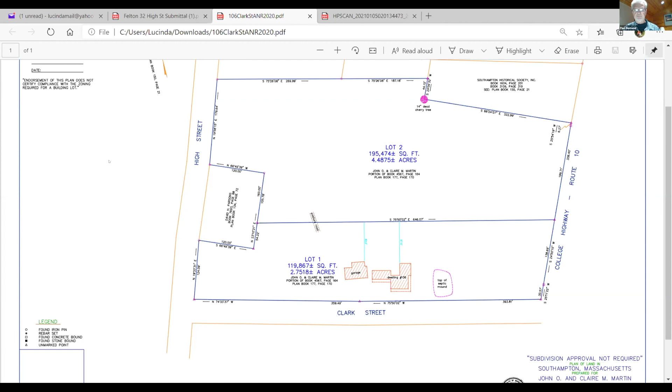Okay. Thank you. A quick question, Paul. Yes, John. The Mylar, will that end up in the planning board slot at some point that I can pick up? Well, I'm going to sign those, and I could personally drop it off at your house if you'd like. Sure. When do you want to do that? Okay, so you're at 106 Clark then? Correct. All right. I'll probably have it there Friday, no later than. Okay, and if it's more convenient, you want me to pop over your place, let me know that too. All right, will do, John. Thank you. Okay, thank you.

Our next agenda item is the continuation of a public hearing for a stormwater permit that Greg Felton had filed back in October for 32 High Street. And it's been continued twice previously because of the lack of information that we required. And I believe Bucky Sparkle is here, who is representing, he was here, there he is. I am. He is representing Greg for this project.

The plans had been emailed to all the members of the board, and also I believe Randall, you received them, and Ron and Ed. Conservation has received them. So at this point in time, we'll ask Mr. Sparkle, can you share those from your end? Looks like I can. So let me start this. So it's the one that you sent the planning board, not the one for conservation. They're probably one and the same, but in case there are any... They are indeed the same plan.

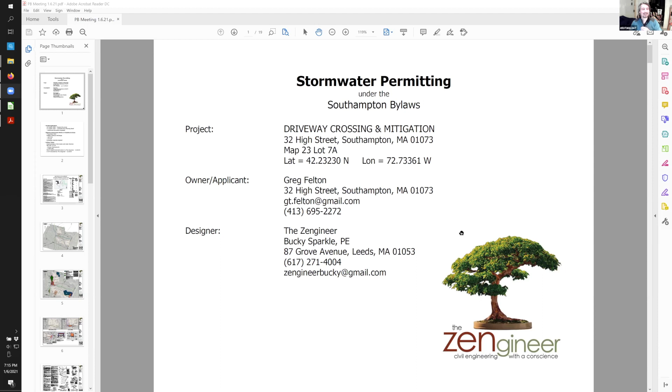And hopefully at this point you're seeing a screen that says stormwater permitting. Yes. Right. So what I've done is I've taken those plans and incorporated them into a modest little presentation that encapsulates the information that I'm aware of on this project. As you, I'm sure know, Greg Felton has been doing his best to do an awful lot of his development on his own, from running machinery to cutting down trees to letting all sorts of stuff happen that has not been done professionally. And I applaud his self-starter gumption, but I also see how he's ended up in a fair amount of hot water for a variety of things. And he's asked me to try and get him out of that hot water on a few points. So here, let's see how I do. Because I'd really like to get him back into compliance.

I think just to give a little background, Greg did his own application mid-October. We got comments back, received an email from the planning board a little bit after that. That was the basis for the letter, which I eventually submitted. But before I was able to do that, there was quite a bit of rain on multiple occasions, and I see Randall Kemp is on the screen because we did receive a serious and appropriate letter indicating that there had been multiple sediment discharges. The latest one being, I think it was the 1st of December, we had 3 inches of rain that day. And that site was insufficiently stabilized, and an immediate response was required.

Greg did get the street cleaned up. Hopefully Randall is satisfied with how that went. If not, I'd love to hear from him. If there's anything else that we could do better, I'm very open to hearing that. But part of that letter also said you need to come up with a plan. Of course, a plan needed to go with the permit application originally. So I was able to get out to the site about December 7th and take a look at the work that had been done to clean up the mess, the work that had been started to try and ameliorate stormwater runoff and sediment discharge off-site.

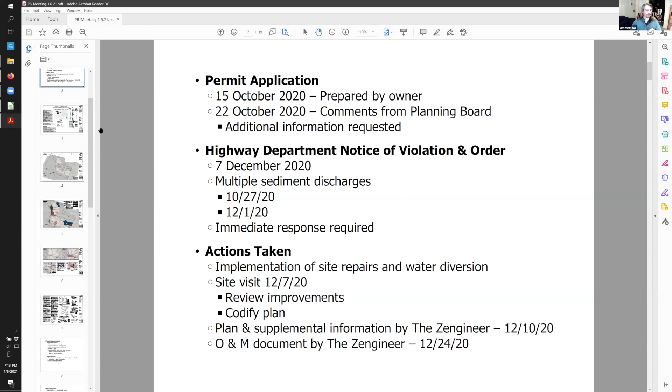I submitted a letter that addressed all of the points of missing information in the original application, and I provided an O&M document for the features that are going to be installed or are being installed. Now, let me jump in my presentation a little bit. We'll look at the existing conditions briefly just to orient people to the site.

So we have in the gray the long driveway that heads up, the future house site, and I will show where that house is on a proposed plan. The existing conditions also at the time showed a 12-inch HDPE culvert here that's still in place, as well as a small pipe that goes right to the edge of the road and a ditch that had been cut into the buffer zone. So this is the 100-foot buffer off the wetland. So anything north of that line needs to be approved by the ConCom, and this work had not been approved.

So I've been working with them a little bit, and I know Marla Hank is here, at least was earlier. So we're trying to keep this from being an ongoing problem. We're going to look at a proposed plan here, and most of this is dealing with the NOI. So there's a lot of color, there's a lot of action on this screen. I'm including it here because one of the things that the board requested was showing where the proposed house is going to go and the septic system.

So this box, this brown box here, is the proposed house site, and the proposed septic system is right here. And you can see the driveway, you can see the existing 12-inch culvert, and then you can see some proposed work. And then the next slide I'm going to show is going to detail what's happening down here a little bit better. So let me focus on this part of the world right here.

So in order to try and get a grip on what's coming off of this site, several things have happened. One is the previously permitted ditch was repaired because it had sustained damage during the heavy rain on December 1st. This pipe is still in place. The ditch has been extended to a new catch basin. I actually ran out there yesterday briefly, and there's now stone through here. There is a new catch basin here, and there's a 12-inch pipe coming down.

Now, I show a nice clear rectangle. This is a proposed retention basin, and Greg and his contractor were getting this installed, but because they were working in the buffer zone and it wasn't permitted yet, they've also stopped. So this work is not entirely done. It's in process, which makes this conversation very awkward because I can't say, oh, you know, we're going to be doing this. I'm sort of at this point of saying, well, they've kind of limped along, and then we had to stop them till we had everybody's permission and approval.

What remains to be done out there is connecting this 12-inch pipe, disconnecting the 4-inch pipe that already exists and replacing it with a 12-inch pipe. And then this 12-inch is in place, it runs all the way down here. So the sediment basin or retention basin is now sitting in this part of the site. It's deeper than I was asking it to be. I haven't done measurements on it, which is something that I'll want to see in the final result, that it has the volume that I'm calling for.

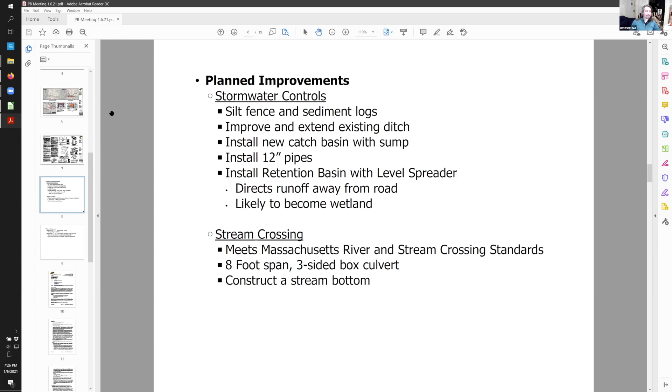Separately, this is more for the Concom, but on the uphill part of the site, and let me just jump to where that is. There is a driveway crossing here. The stream comes through here, and Greg had taken out an old little culvert thing and put in another small culvert. It did not meet standards, so this is how I got involved, and we did a stream crossing right here. So the detail is it's a big 3-sided box culvert with an 8-foot span.

So that's part of what's going on, because I think Greg has had some issues getting all of the water that's coming off the site to go through that little 8-inch pipe when we get 3 inches of rain in one day. So I think that has caused some of the problems here. So that won't be a problem anymore.

Oh yes, officially the last thing I do need to request is waivers from a couple points that are normally required for these permits. One is for the topographic survey, bylaw 14.g.1.g. At this point, pretty much all of the site work is complete, so a topographic survey doesn't really add a lot of information or value to the process, in my opinion.

And then bylaw 14.g.1.n1 requests proposed profiles and cross sections. And again, this work is basically done at this point. The 2018 Bill Saruta plan had a profile and cross sections for the road, the ditches, the culverts. That information was submitted with my plans, just so it was on the record as part of the submittal and permit.

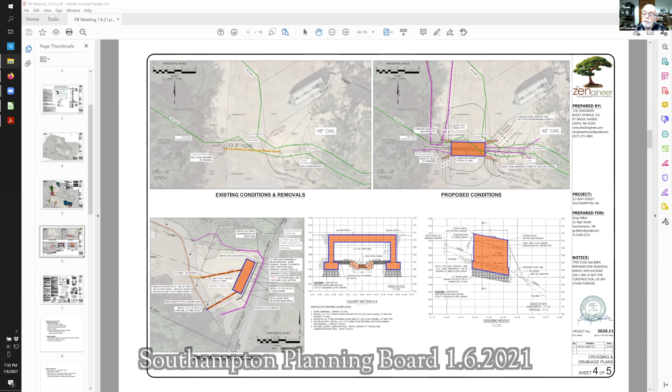So who directed them to put, so that was something that was not discussed with Randall? That was no, unless it was Concom business, but it was nothing that I had requested for sure. If I can speak from the Concom, I did get in contact with Bucky right around that time, just before Christmas, and my communications with him were to allow any work on the left side of the driveway, which was our RDA area, that would be perfectly okay. I went up there on Christmas Day just to see what was going on, and that, in fact, is what they did. Actually, Greg and his girlfriend were up there with a shovel, trying to curtail some of the water that was flowing down. But it looked pretty good to me, and I did communicate that with Randall that the site looked okay. I also followed up with Bucky with a written email stating the same conditions, that it was okay to handle anything left of the driveway.

I'm sorry, who's Bucky? I keep hearing that name. Oh, I'm Greg's engineer. Okay, sorry. So the excavator part, somebody was working on that lower retention pond as shown in this drainage improvements plan here? Yeah, so consequently, and I'm speaking for Marla because she's the one that saw it first, and then I followed up later. When I went up there, they had shaved away some of the hill, sort of made it so that the water would flow down that way. And again, this was in the buffer area, and they had dug out this retention pond or retention area. So that was done totally by Mr. Felton's permission, certainly not from the Concom.

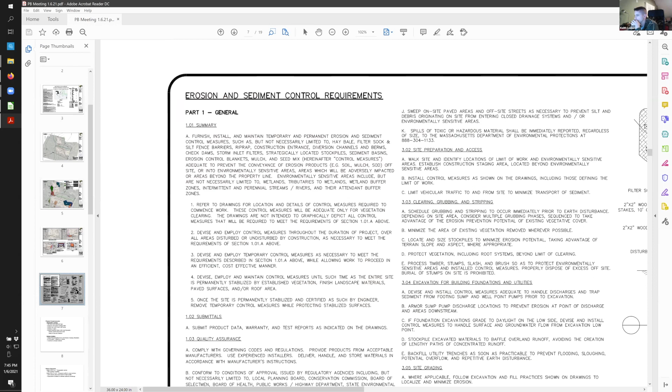Okay, so the details of the overall plan, or the construction details? I mean, the construction details, the ones that were hard for me to see. I wasn't sure. Yeah, sure. You had a profile there or something. I will. Let me back up. Actually, this plan that you were on previously, the previous plan. The previous plan?

Yeah, the one that you had the plan view. Okay, so what are we looking at? I see a culvert here. Where's that going in? All right. No, unfortunately, I don't get to see where you're pointing. I'm looking at culvert section AA, right in the middle.

Culvert section AA. Okay, so this is the box culvert. This is the section of it. This is a profile view of it. This is a plan view of it. So all of this orange here is replacing the 8-inch plastic pipe that is on the uphill side of the driveway. So it's not in this view. I have to go back one sheet. I see it. It's upstream. Yeah, it's upstream. So most of the work that's going on is down here.

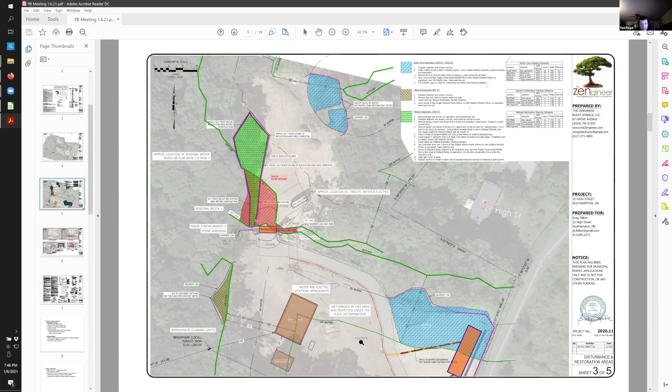Can you zoom in back to that culvert? So that's a hefty upsize from what's up there now. It is quite a hefty upsize. The Massachusetts stream crossing standards are relatively significant. And they're not there for hydrology. They're there for wildlife passage and maintaining a contiguous ecosystem through the water, the stream bed, the banks, all of these precious things that are disturbed when we build culverts.

So the box culvert allows you to have a big open stream that runs underneath. It's 2 orders of magnitude bigger than it needs to be to handle the hydraulic flow, about 100 times bigger. So we shouldn't have any more problems of things getting blocked and water going where it's not supposed to be going once that is installed. So you have that layout there and sized it appropriately from the standards. Yes. And so that's something he's going to cast in place himself. He will cast that in place. Sometimes they're prefabbed, but Greg is planning on building it on site.

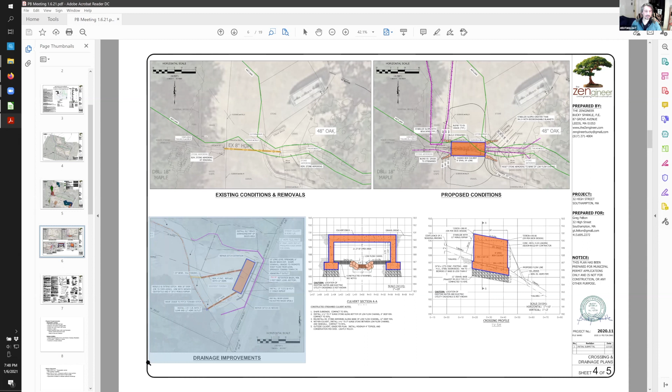Okay. And then do you have details of the connection and the hydraulic connections to the lower retention pond? You have 2 points. I know that you kind of have a general plan that's showing out what the plan is, but how is someone going to figure out elevations, or what do you have there for elevations and overall detail? It is true that here's a case where lacking a topographic survey, it does not give me the opportunity to say, oh, the ditch elevation is 152 and we need a pipe. They come down and the invert has to be at a certain elevation.

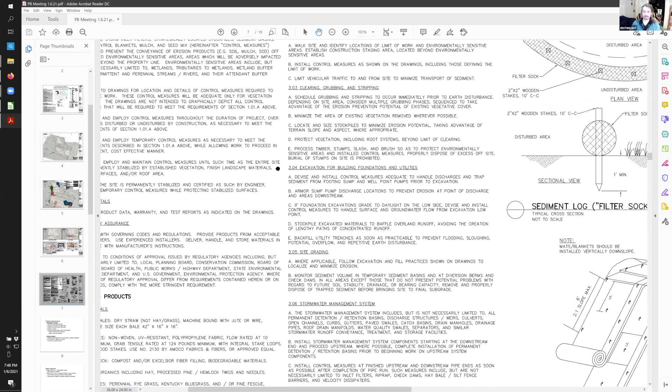The way I've designed this is established a relative elevation here. So if we go to the next sheet, I want to show you just a section of the... so here's the wetland replication. So the level spreader basically, and this is a section of as well as the retention basin itself. So it needs to be at least 18 inches deep, and we have so much elevation to play with, and there's no question like, well, can we get water to go there? Yes, water is very, very rapidly going there.

So what I've done is designed it as in, all right, we take an area that's relatively level, we cut down at least 18 inches minimum to the top of the level spreader. So this bar here is the level spreader, and there's a requirement to be at least 6 inches of freeboard above that, and then building a berm downhill of that. So it's a relative design, and any competent contractor should be able to handle that. I'm sure Brendan Monahan will have no problem. Frankly, more than half of this work is already done.

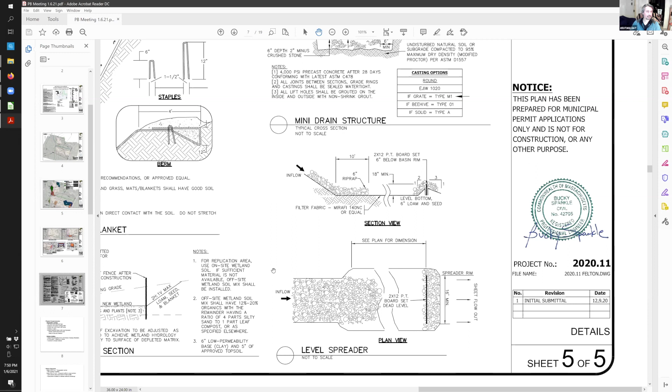And it's a little overbuilt. From what I was able to see, it's deeper than it needs to be. No problem with that. So Brendan was erring on the side of caution, it seemed, in terms of installing that. There is a berm on the downhill side that also supplements the 6 inches of freeboard. So if we jump back to this, where are we? When I'm zoomed in, it's hard to see.

Right, so basically my plan was to take a lot of the spoils from this excavation and put it on the down gradient side, because there is a slope across here, and I wanted to create as much buffer in between the basin and a potential overflow, because I want to control it at the level spreader, which runs on the northern side of the basin. So this is great. Okay, so this is an appropriate amount of detail.

I have some general questions that, you know, you're asking for a few waivers, and one of the recommendations that I would put to the board, if the board agrees, include, in lieu of the topo, and if this is something the board can discuss, you know, you provided relative elevation needs for the construction of this, as well as the overall sizing of the pipes, the 12-inch plastic pipe, as well as, actually you have two 12-inch pipes there, as well as the low sump or shallow sump catch basin that's at the downstream side.

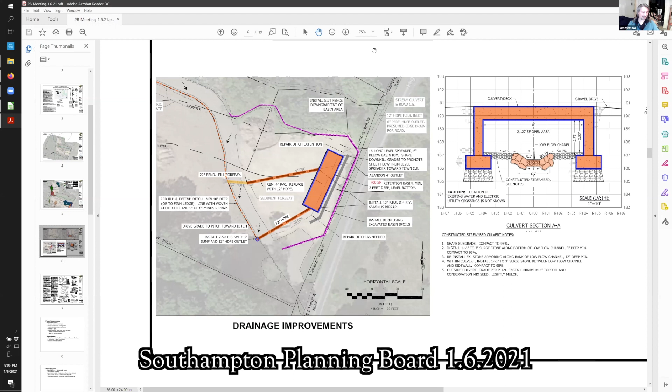I think engineering judgment goes into what Bucky's done here, and the level of preparation should be considered, given he's putting his professional liability on it. So I think that, coupled with his oversight during construction, might be suitable, if the board would consider that, given that we're just tacking on with the bond and then the peer review. That's just making the cost go quite a bit up. It's up to the board what the board feels comfortable with.

No, you're absolutely right, Paul. That's stuff that typically on a residential we haven't required, but this situation certainly is out of the ordinary, and the horse has been out of the barn a long time on this. So yeah, I can go either way on the bond, but again, if Mr. Sparkle puts his certification on it and inspects it along the way, we could trust that. I'm not quite sure we need an independent firm to come in on this unless some of the other board members feel strongly about it.

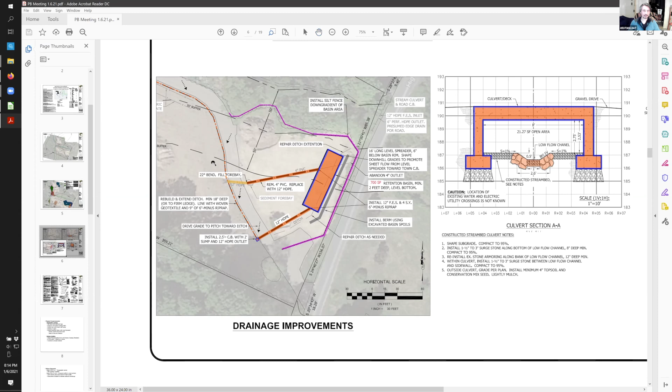Although I'll tell you, Paul, that annotation function, is that a Zoom thing that I'm just not? Yeah. So pull up your view options. Oh my gosh. You got it. I've never attempted this, so thank you. You're welcome. All right. Hey, I've learned something today. That's great.

So this dash, now that I've zoomed in, maybe I'm in a little bit close, but this dashed orange line is the ditch. This is the existing HDPE pipe that runs under there. So right now they have stone. We've got like 3-inch stone that is now lining this channel. The site's still a little messy, but it does hold water to this point.

And then there's a little rise. So almost all of the water is going to go to this culvert. It won't make it to the catch basin that's lower. So the catch basin is a backup plan in some ways. If for some reason this culvert is blocked and or overrun, he has added another 12-inch pipe.

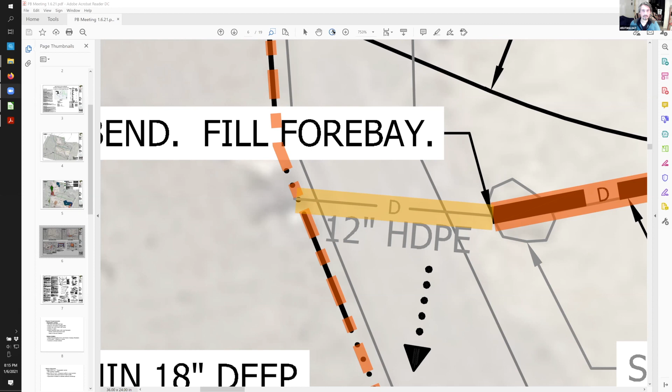I do want to back up a little bit. All right, there we go. So there is another 12-inch pipe that now runs through here and actually enters the side of the catch basin. So if this fails to handle all of the water, this now is in place.

And this is a buried pipe that comes along underneath the ditch, which then has stone over the top of it, but it's more like 1.5-inch stone, a little smaller. And that enters, this catch basin's already existing. He already built it. And then they have a 12-inch pipe that comes out down this direction.

So all of this is really a backup system and would only handle water that comes from the sky for here and a bit that comes from the hill above. But that doesn't necessarily all drain here. Some of it naturally flows this direction to the bottom of the screen. I guess it's relatively south. So that's how it looks right now.

So if you were to look at this ditch in cross section, if you were to stand up here and look down, you would see, here, let me do some drawing right on my own screen. You'd have the road coming over, the ditch would come down, the big hillside comes up, and the culvert end is here. This is really hard to make look good.

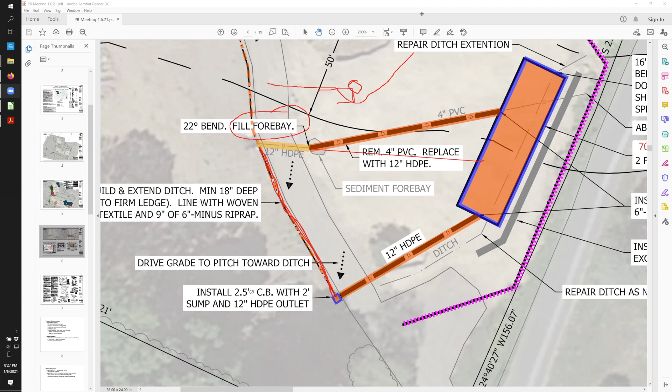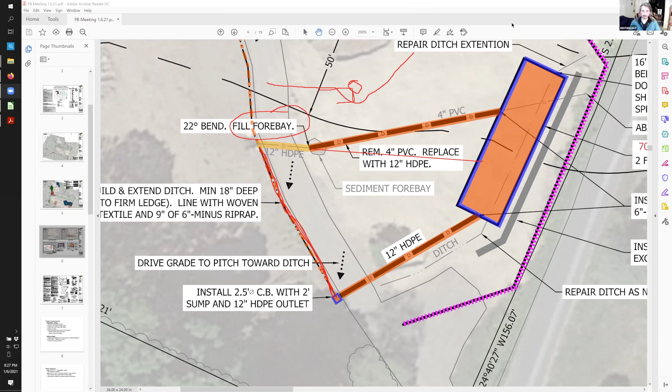Okay, that being the case, let me just go over, let me get a motion first to close the public hearing. This is Janet. May I just ask one question, Mr. Sparks, before you come? I believe you mentioned at one point that this orange thing here, the water would be going over High Street. And I just wonder, where is it going to go over High Street, and where will it go after it goes over High Street? Because we are down below this. Water only goes downhill. It doesn't cross High Street, fortunately. Part of this is very important to keep the water out of the road. So all those annotations, just stay right there.

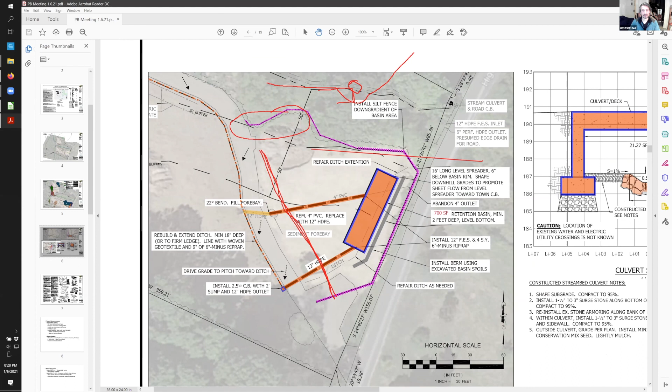So there is a catch basin here, which it's a catch basin and it's a headwall inlet for the stream, the intermittent stream that's on site. So the water from this entire site and the system would flow to the north. And isn't that uphill? It is not. No, the stream is much lower than this part of the site. And the road is much lower too. So I want the 4-inch pipe that currently discharges to the road right away. I want that eliminated. And then I would like to see the water sheet flow gently toward the stream and then toward the culvert catch basin that is under High Street.

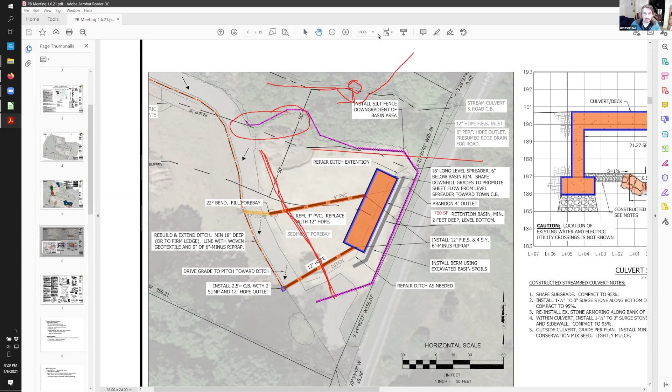So the water would flow under High Street. It wouldn't get into the pavement at all. And I really want to keep it out of the right of way too. I don't even want to run it along the side of the road. There's no ditch there. Under High Street into what? Is there a culvert? This stream. This stream continues. And I don't have mapping for it going past. And if we jump briefly, these annotations are stuck here. I'm going to have to learn how to use that better, right? But this stream that runs down through, that's shown in blue, goes through a large culvert and then continues. And I'm not exactly sure what direction it goes from there. It goes to the northeast and east.

Yeah, well, I know the damage that was caused on Mr. Kent's property, and we abut him, so. Is Mr. Kent the house across the street? The gray house, yep. Yeah, that was pretty upsetting. Yes. Especially to him. No doubt. Yeah. I have a lot of sympathy for his situation, and maybe he'll be able to work something out with Greg at some point. Well, I know we just have an open field, but still, the water still goes downhill. And if he's damaged like that, we could be too. And I just wanted to have that clarified.

Sure. I'm not sure, Janet. Where are you on this map? I'm right next to Mr. Kent and across the street from Mr. Rubner. So you're a little off the bottom of the page, down this way. No, I think I'm up closer to Route 10. Oh, so you're up this way. Yes. Yeah. The open field is. See if I can get you a better answer here with just some quick mapping.

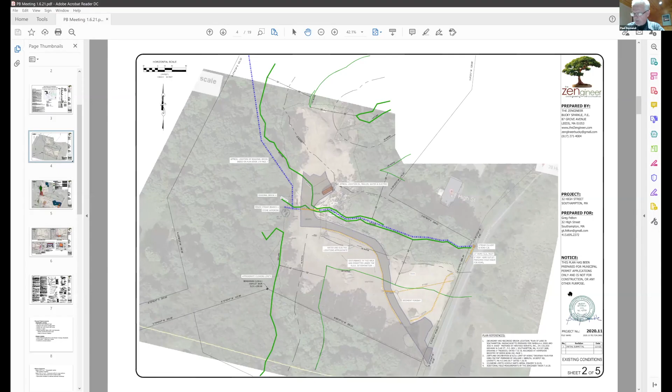Right, can I have a motion then to close the public hearing? I'd like to make a motion to close the public hearing. I'll second. Motion to close the public hearing has been made and seconded. Take a roll call. Keith? Aye. Paul? Aye. Cindy? Aye. Oh, yes.

And now, I'll just go over the conditions here, and correct me along the way if I've got it wrong. Keith, you requested that the box culvert be precast, correct? I think it's appropriate. I don't think that should be a fabricate-on-site element. Okay. I guess my only question is, precast, for that size, does it need a crane to get that in there? Is that doable? You'll need a large machine for sure. A small crane or a large excavator, one of those would be necessary.

Yeah, the culvert would be several pieces. It's 8 foot inside clear span by 24 foot long, so most likely it would be 4 foot segments. A moderately sized excavator will easily handle it. But I just don't see the ability to cast this in place and withstand H20 loading requirements. Well, I didn't see any rebar design layout or anything of that nature. It called for rebar, at least in the footings, but to my point exactly, there's no. I think the note actually listed it as a contractor design build, but I think a precast element would be more appropriate. Take the guesswork out of it and the QC out of it.